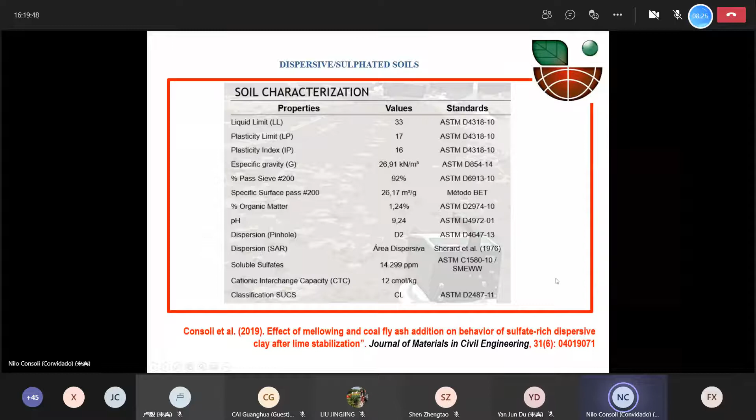Here are some other pictures from the region, and we can see the problems that we have. It's important to note that these problems occur about 6 months after the road was built, just to give you an idea.

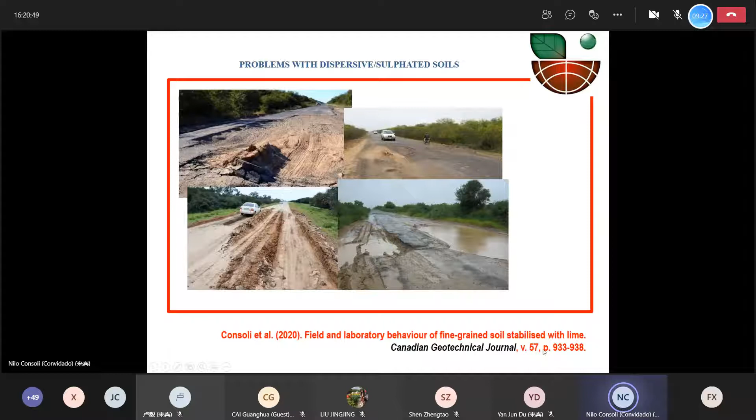We will also show a paper published last year in the Canadian Geotechnical Journal about this material. Another problem we have here in Brazil, and possibly even in China you've heard about, was some incidents we've had with tailing dams in Brazil.

Two years ago, there was a place where we had the failure of a huge iron tailings dam that killed about 250 people. So we started to study these tailings and some others too, and we realized that one of the problems...

...was due to the way it has been disposed upstream dam, and we can see this easily in these stress strain curves, and also here in the stress path. We can see that in the stress path, for undrained stress path, we have the collapse due to the reduction of the effective stress to zero.

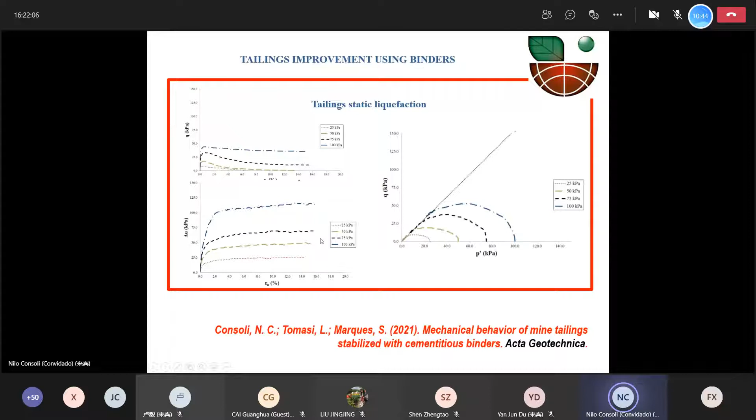So we have this static liquefaction in such material. In order to try to solve this problem, we thought about using some binders to improve the material. This material has such a behavior, but after inserting some amount of cement, in this case 75 kilos per cubic meter inside the material, we turn it from a material that is liquefiable to one that is completely changed. You have some real cohesion, and so it does not liquefy anymore.

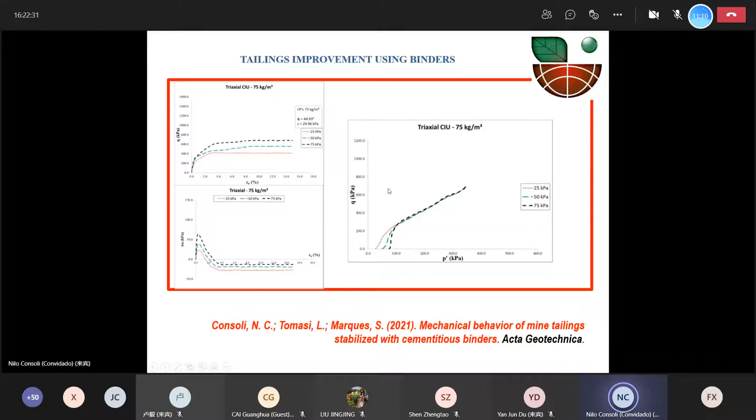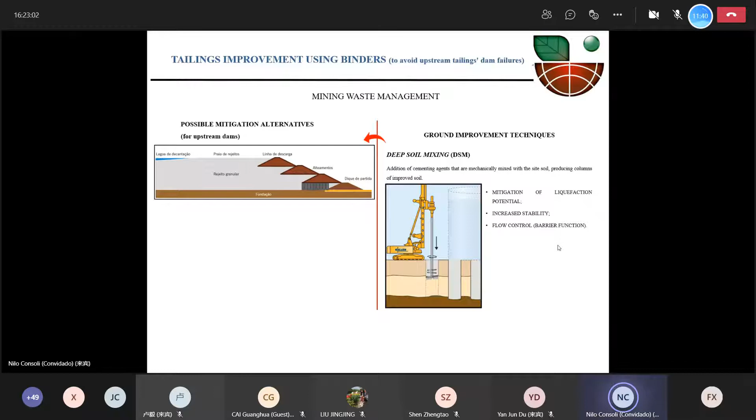The concept we've had for this problem, regarding some upstream dams in Brazil that have to be decharacterized because of the failures we might have, was the idea of using this deep mixing of soil right below the dam, the upstream dams in this region, in order to improve them and avoid the possible collapse that we've had in some cases, so avoid future collapses.

Another problem we also have to look after here in Brazil, quite common, is the possibility of using mass stabilization, mainly in highly organic clays. So we can see here this idea of mixing some kind of cement into the organic clay.

This was a case just to give an idea - this specific soil was in the city of Rio de Janeiro. In this material, we have about 50% organic matter content, and the natural water content was ranging between 500 and 600%, which was about the liquid limit, or even above it. So in this case, we also have problems with sulfate, and the pH was quite low. It was really a difficult soil to deal with.

So we tested in the lab the idea of inserting different amounts of cement, and also putting a preload on top of it. This preload is because of the embankment that is usual to put on top, due to the difficulty of reaching the position to improve it if you don't have it. Also, you have a geotextile on the bottom. Usually the thickness of this embankment is about 1 meter. So we were also dealing with this situation in the lab, the situation that has happened.

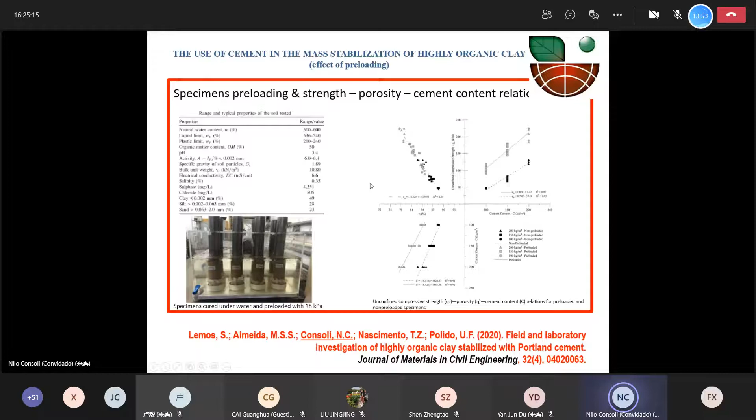Here we also have some results of this unconfined compressive strength test, but also the stress strain curve, and we can see the difference between specimens that are molded and mixed in the lab, and the ones that were collected in the field. So there's a difficulty in mixing in the field through this mass stabilization. But even though it gets much better, the unstabilized material is quite down here.

We also measured the secant modulus of these specimens, and we've done a correlation between unconfined compressive strength and the secant modulus. We have the results from the lab, and the red ones here at the bottom are the ones we collected from the field data. They fit exactly the same curve, but as I said, the field mixture gets them quite below here. This is a problem of execution.

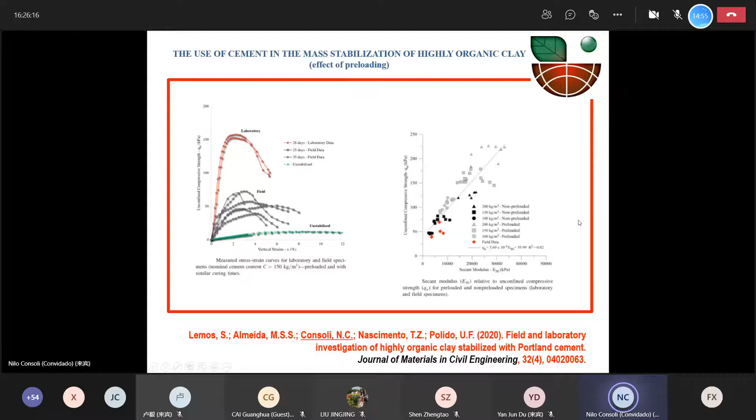Now I'm going to start talking about the idea of sustainability. The idea we had in such situations was to change from Portland cement or even lime that is bought in commerce. Instead of using those materials, the concept was to go after residues that could be transformed into cement. These residues could be from industry, agriculture, even domestic and construction wastes. The idea was to reduce the impact of cement, which we know is a problem regarding CO2 production, from the production of Portland cement or even lime.

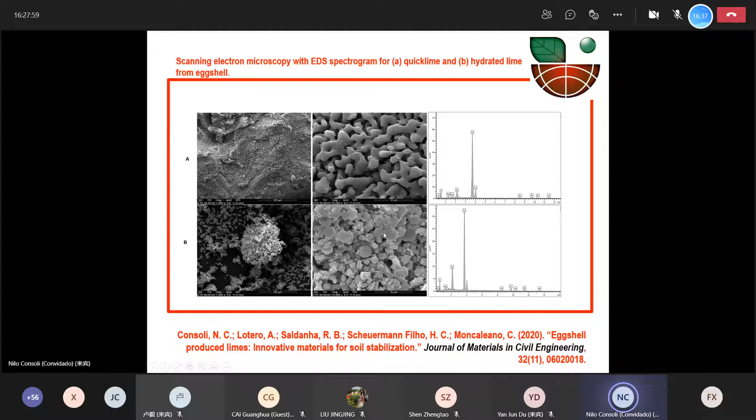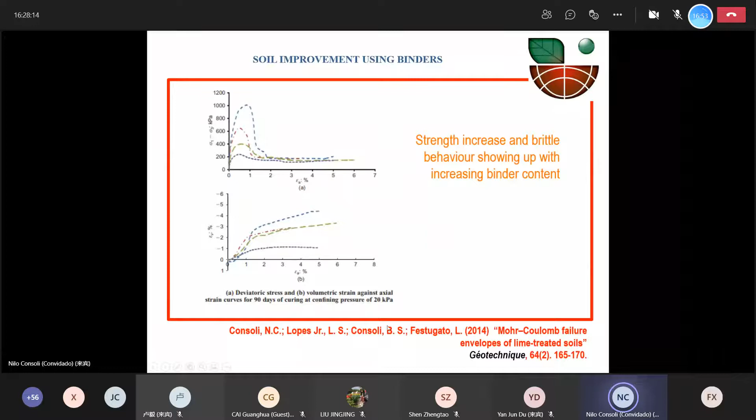It's interesting also regarding the amount of lime you put in a certain soil. For example, this was published in Geotechnique in 2014. But even more interesting than that, we got a patent of a new binder - it was mixing the eggshell with ground glass. Both were residues, and so we had a new binder that was possible.

We can see here in the X-ray diffractometry the formation of a new cement will form tobermorite, which is also formed if you use Portland cement, for example. This was specifically a paper from 2019, also in the Journal of Materials in Civil Engineering.

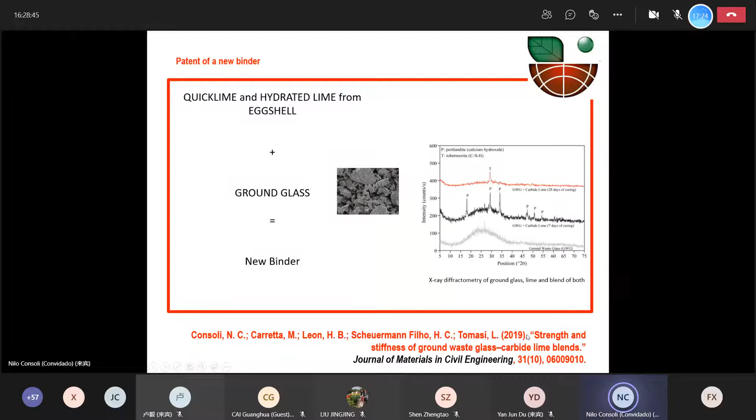In 2020, here we have a paper published at the Journal of Geotechnical and Geoenvironmental Engineering from ASCE, and we show this cement cured for 7 or 180 days, and the relation between the initial shear modulus and unconfined compressive strength that we can get, using it in a sand. So we mix this cement with sand - here we have a fine sand, this is a uniform sand, this is a non-uniform sand - with different periods of curing, and so they reach some strength.

Let's say in this case about 1.5 megapascal. In this case, we can even get 3 megapascal of unconfined compressive strength and some quite high initial shear modulus using this new cement that is based on residues, let's say.

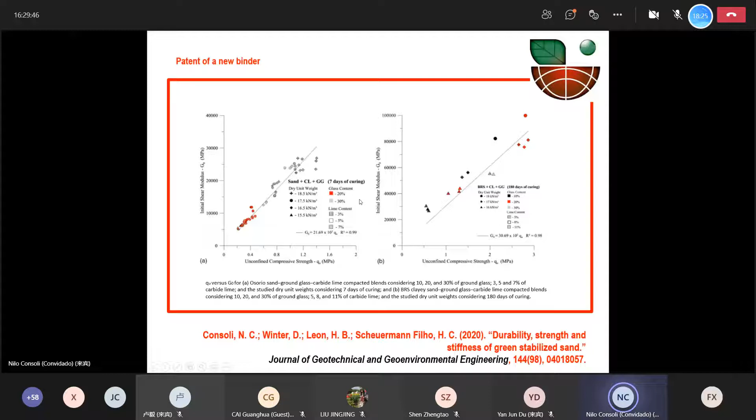And here we went to the field and used this same cement to build some improved bases, in which at the top we used to put some shallow footing. That was published in 2020, also at the Journal of Geotechnical and Geoenvironmental Engineering. So we call it a green cement, used in the field to show how you can really improve.

So instead of using Portland cement or even lime in other cases for clays and so on, we are using this cement that was a combination of ground glass, which is a residue, and eggshell lime that was burned, built after this quite sustainable line, let's say. We could share this idea.

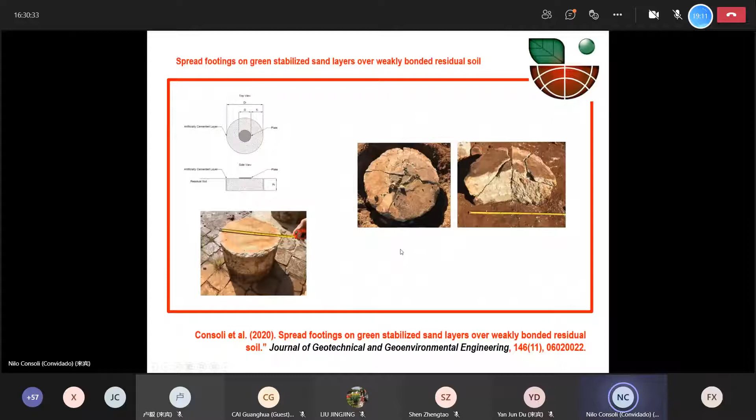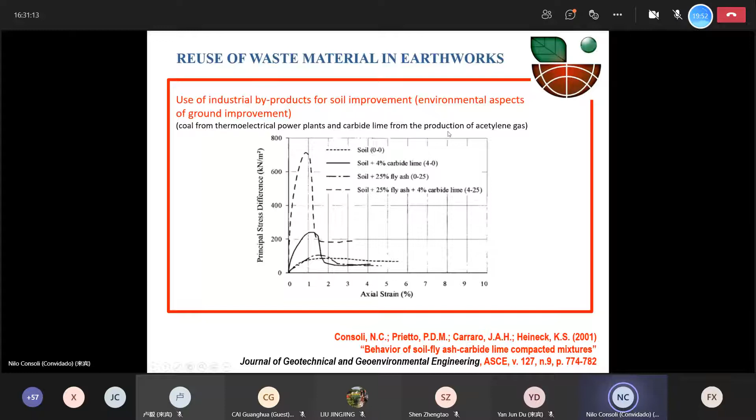This is a very old paper, but just to have an idea, it's from 2001, about 20 years ago, where we published. So our research in this area of new cements, but basically improving the soil, started in the 1990s decade. Since then, we have been searching and trying to find out how to solve problems with these materials, and instead of using the usual cement that we know is not sustainable, we have used residues to cement the soil.

For example, this was a paper published in 2008 on the same concept of using cement, but in this case we are going to put a shallow footing that is going to be pulled out. So instead of digging a hole, putting the shallow footing and just inserting sand, we put sand with different amounts of cement, and we show that if we pull it out - this was carried out in a centrifuge at the University of Western Australia, where I spent one year during one of my sabbatical licenses.

We have tested and proved this. We can see in this figure, normalized, the pull-out force we have here would be about 50. If we put 1% of cement in this backfill material, we can even double the maximum load. If we put 3% of cement, we can increase to 170 the normalized load, the applied pressure or stress. And if we put 5% of cement, we multiply by 5 the peak pull-out capacity of this soil. We also tested some CPT tests inside the centrifuge, showing how it improves.

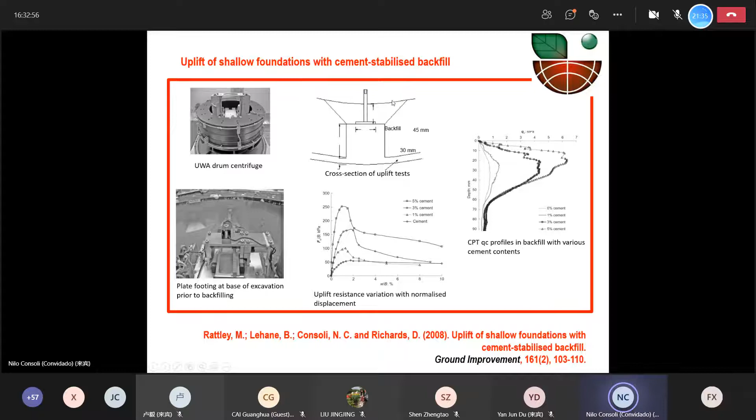This paper was interesting because we showed, even though it was in a small scale, the capability of improving this backfill in order to raise the uplift capacity of a shallow footing. After that, in 2013, we also published the journal.

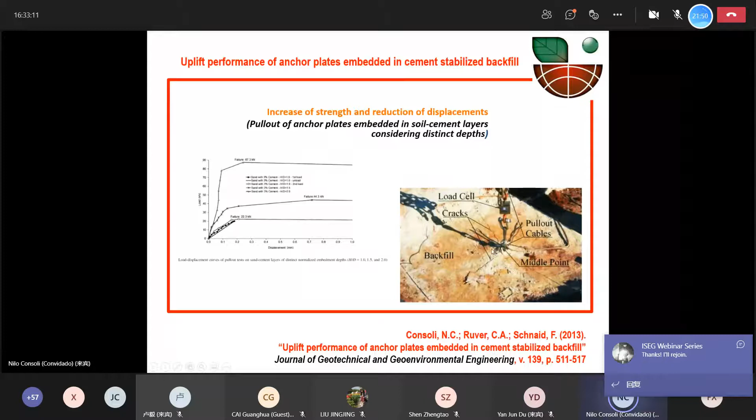We have done this in the field and shown that it's quite interesting, a good solution. Here are other cases where we improved layers and then put shallow footings on top. We have some numerical analysis showing where the tensile strengths start the failure mechanism.

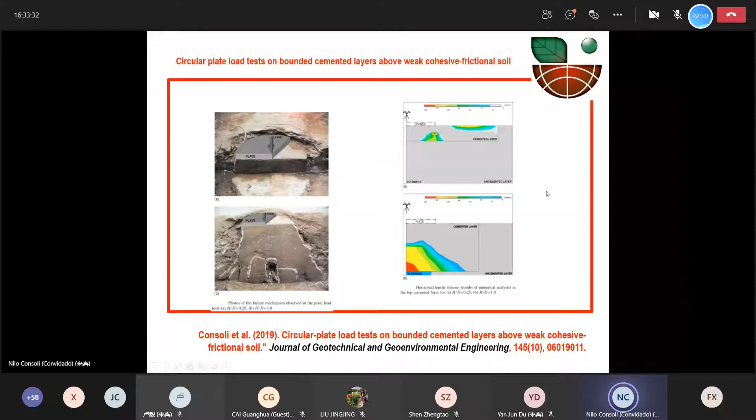That was published in 2019 at the Journal of Geotechnical and Geoenvironmental Engineering. But the title of this presentation was about how, after so many years of research, we had not had until that moment - and I call back to 2007 - a way of dosing the amount of any kind of cement, which in our case is not just inserting some kind of binder, but also involves compaction.

So you realize that, differently from concrete for example, in our case we can control the porosity of the material through compaction. And here we create a new variable, which is the volumetric cement content.

We proved through many years of research that we could get an index here that is porosity divided by volumetric cement content, which controls initially the strength of these mixes with any kind of binder. But first of all, we used Portland cement.

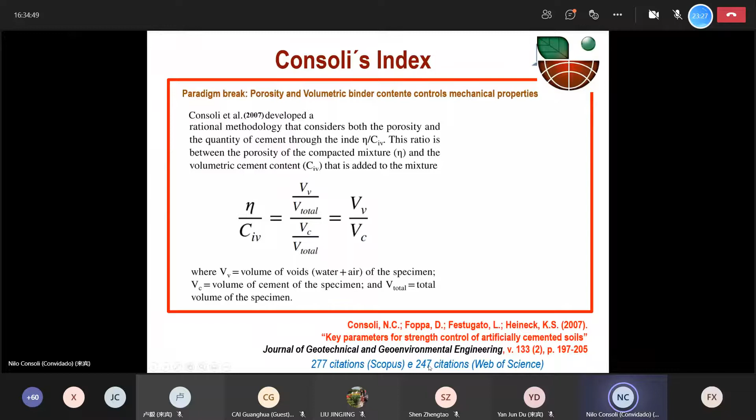This paper was published in 2007, and nowadays it has almost 300 citations at Scopus and about 250 citations at Web of Science.

Just to have an idea, in this case if we have compaction curves with different energy, and we choose some points of different dry unit weights and different moisture contents, using different dry densities and different amounts of cement from 1 to 7%, we can get a drawing of porosity versus unconfined compressive strength for each amount of cement.

These are the results for 1%, 2, 3, 5, and even 7%, each with different porosities. If we put all this data into a figure of unconfined compressive strength versus this index - which nowadays we call Consoli's index, an idea from Professor Krishna Reddy, because I'm going to show you its use not just for strength but for several mechanical properties and also performance - you can control it through this index. So as I said, this is a unique curve that we got experimentally.

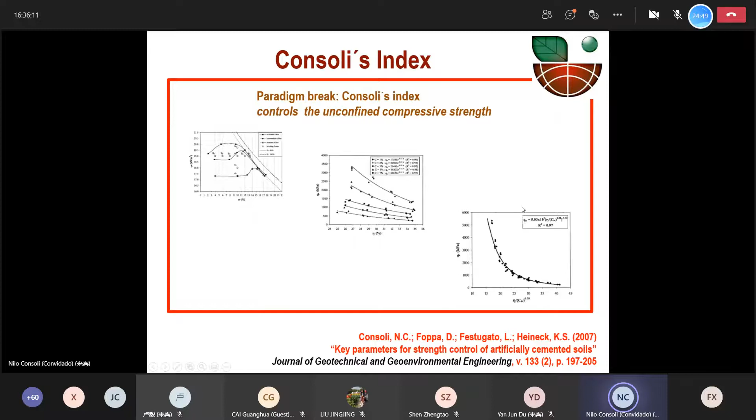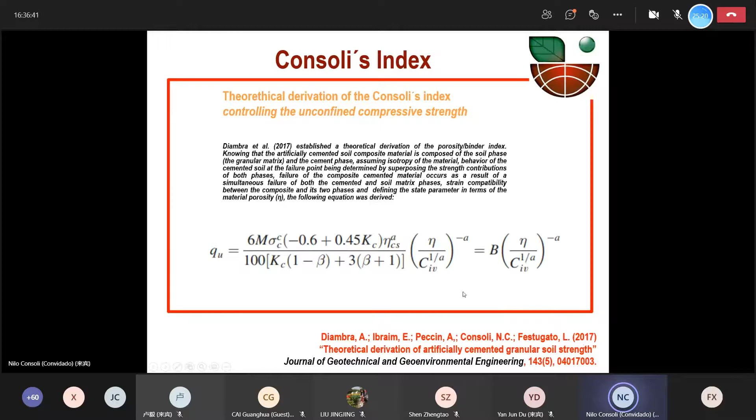It's a power function. But then in 2017, in joint work with the University of Bristol, we carried out a theoretical derivation showing the capacity of this index - a theoretical derivation that really shows that the porosity and the volumetric cement content really control the strength. That was published in the reference shown just below here.

In 2010, experimentally, we showed that if you test unconfined compressive strength or splitting tensile strength - checking both compression and tension, varying the amount of cement and also the void ratio or dry density - and show these results with all these amounts of cement and different dry densities, you get unique curves: one for unconfined compressive strength, for example, and another for splitting tensile strength.

The equations are quite similar, even the power here is the same. So if you divide the full equation for a unique sand, but with different amounts of cement and different dry densities, in the end you get a scalar. This scalar is the relation for this material, for this cement. What is interesting, and we have shown later, is that each soil and each kind of binder has specific values that vary between 0.10 and 0.18. This is specific for this one, so each material might have a different value inside this range.

Using now the binder that would be just lime, for example, we published in 2009 the idea also that varying the porosity and varying the amount of lime, the volumetric amount of lime, besides its support on cement, with this lime you can also get unique curves for strength.

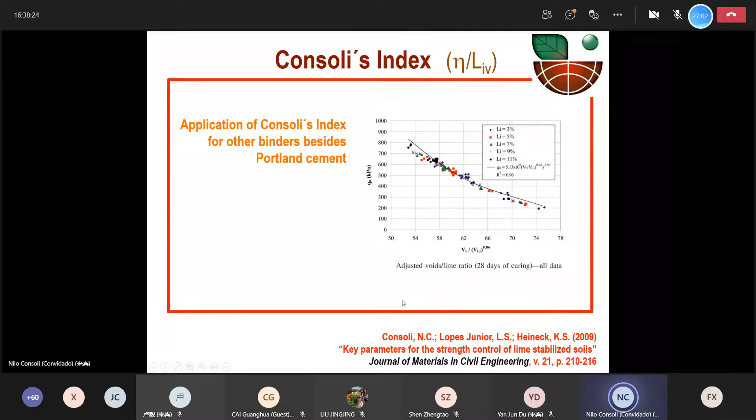This was a paper from 2012 at Geotechnique, proving that besides unconfined compressive strength and splitting tensile strength, we can also control the initial shear modulus of the material based on this same index. So it's not just strength, tensile or compressive, but also the stiffness, initial stiffness, shear stiffness, is also controlled by the same index.

For different amounts of cement and different soils, each soil has a specific curve. But it's important to realize that you can get unique curves for each specific soil and each specific cement, varying the amounts of cement and varying also the compaction effort or the void ratio that you have in the end.

Another interesting thing we can realize from these curves is that you can get a specific strength, for example, by varying the amount of cement or lime and the density. You can get a unique strength this way.

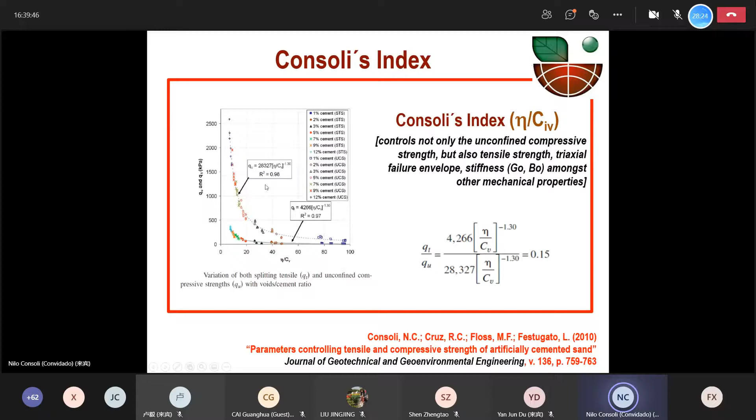Here we got a case in which the relation between porosity and the volumetric cement content was 10, for example, and we molded specimens that have the same index but different void ratios and different amounts of cement, yet they have the same index.

We realized that after carrying out some triaxial testing, for example in this case for a confining pressure of 400 kPa, the stress-strain results were the same.

As I said, this specimen was molded with 0.7 void ratio and 8.6% of cement, and this one with 0.8 void ratio and 10.3% of cement. This was also published in 2009 in the Journal of Geotechnical and Geoenvironmental Engineering.

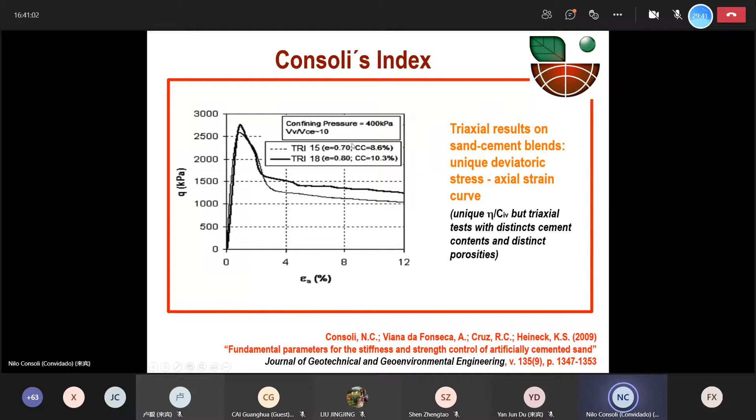So we can say at this moment that besides unconfined compressive strength, splitting tensile strength, and even initial shear stiffness, the whole stress-strain curve is also controlled. For example, if I have a unique value of porosity and volumetric cement content, I can have the same result even with different amounts of void ratio and different amounts of cement.

Another interesting thing we published in 2017, in the Journal of Materials in Civil Engineering, was that different sands—and we can see the shapes are different, the roughness is different, and they are even from different places, this one from Portugal, this one from southern Brazil, and these are even residues with different shapes—but in these cases they are all fine grain sands.

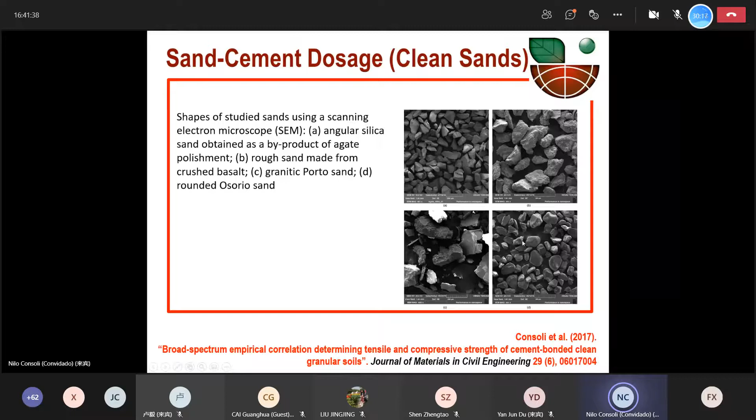So what we realized is that we carried out tests with different void ratios, different amounts of cement, different cements, different curing periods, and also compression and tensile strength.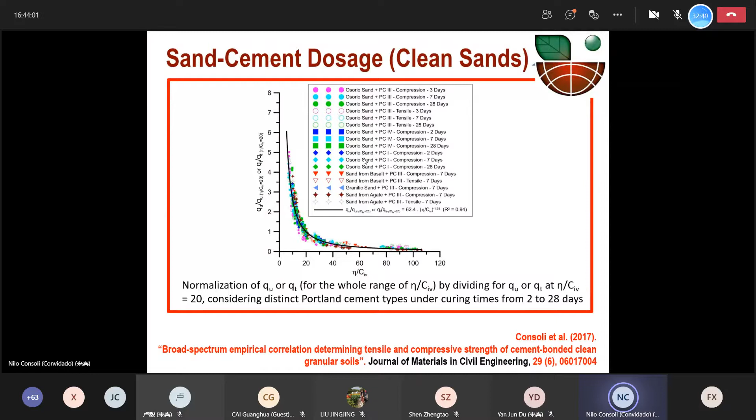There's another work here - these tests were carried out with sand, and we have also done some with clays and even silts, including London clay. This is a paper that Professor Chao-Sheng Tang was a co-author on, one of our first papers, published at Soils and Foundations. We showed that specifically for clays, silty materials, fine grain materials, we also have a specific curve when normalized for all these materials - London clay, organic soils, silty soils, dispersive soils, and so on.

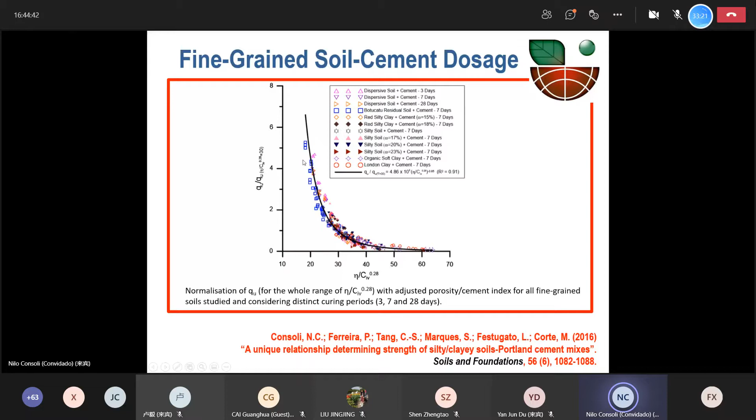We also showed that if you have this equation and just one result - for example, just one specific result for unconfined compressive strength - you have one point, and you use this curve inserting the eta and CIV specific that you have, you can get the whole curve. These results here were carried out later on, just to check if this curve with just one point was able to predict this relation.

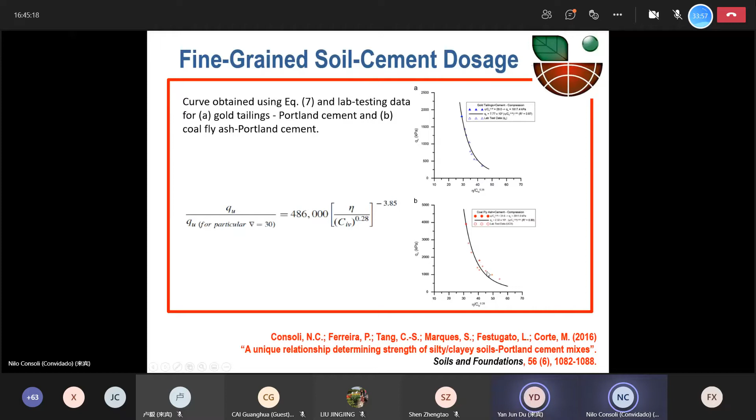And also the same we have done with some coal fly ash and cement - we have just one point, we get this curve, and all these other points were carried out later just to check that it was working okay. We have done also some tests with tailings, in which we are trying to...

Yes, Professor Consoli, I'm sorry to disturb you - one minute please. Okay, I'm going to go just to finish it.

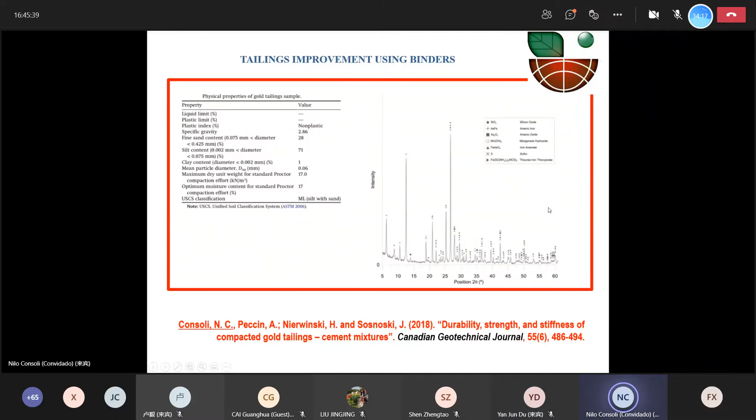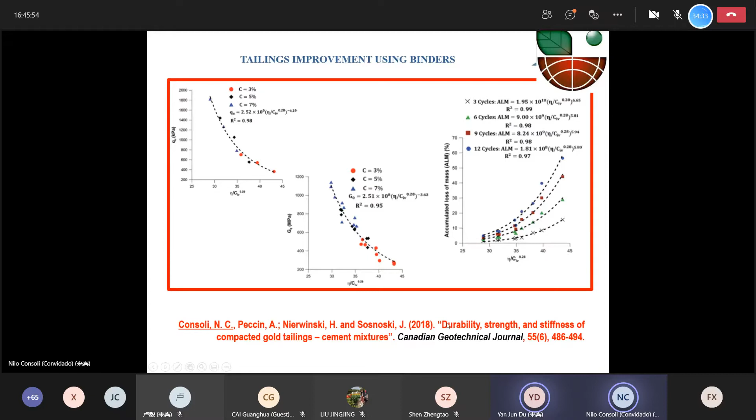So we have plenty of works that prove that you can use this for tailings, in this case published in the Canadian Geotechnical Journal. Besides strength and stiffness, also the durability, which is the performance of the material, can be characterized through this index. You can see details at Canadian Geotechnical Journal, and you can see also the durability at Journal of Geotechnical and Geoenvironmental Engineering. In transportation geotechnics, you have several materials that have been tested and they show the same.

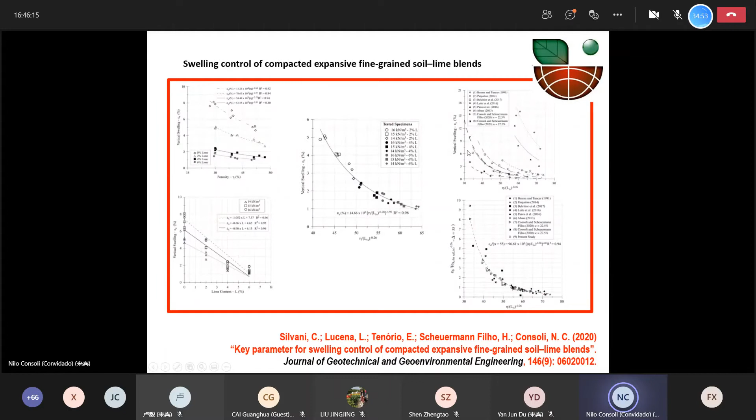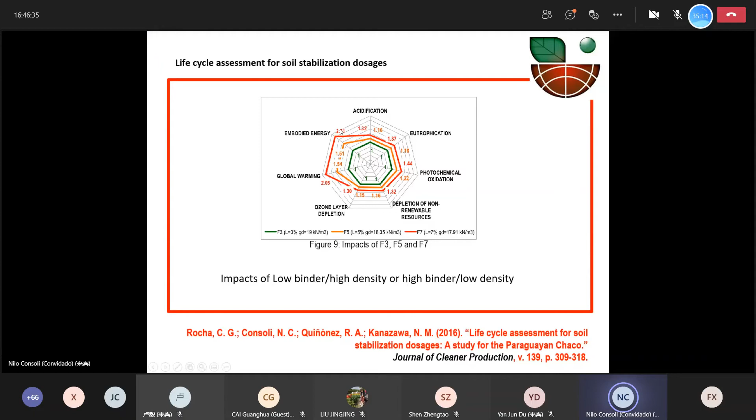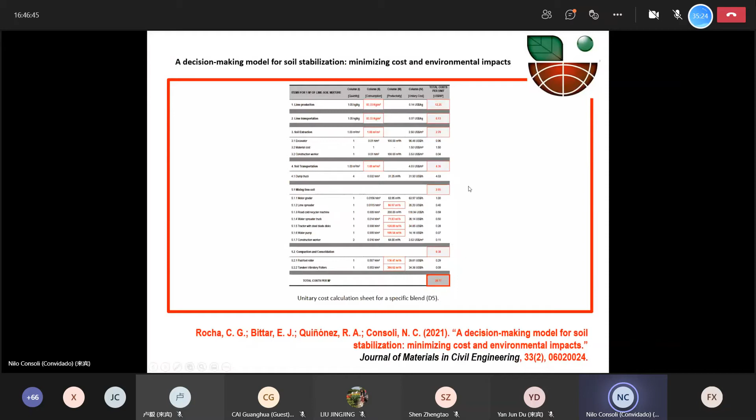And also, finally, we have done some tests to check the cost, published this year in the Journal of Materials in Civil Engineering, and we prove that we can get a decision-making model based on this index. So these are several papers that we have published in the last 3 years on this topic that you can search later if this area interests you.